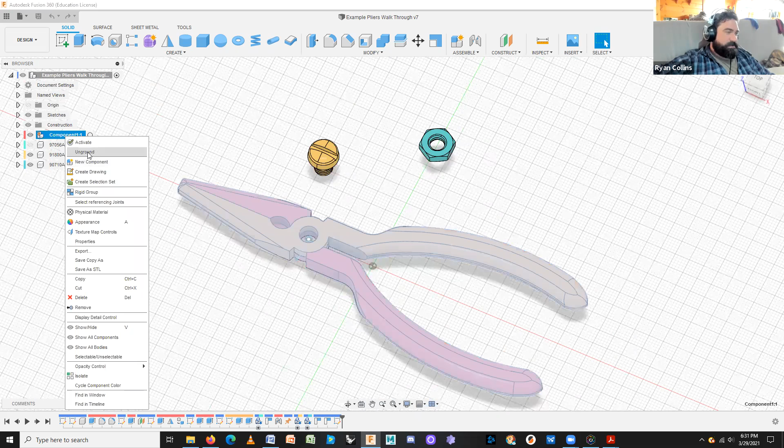Okay, so taking the model that we worked on last week, I have the pliers. One side is grounded, which remember to right click and you can ground. It's currently grounded. So if you click unground... that just locks one side to its coordinates at the moment. So now when I click and drag on the other side, it functions within the limits of the joints we placed on it. Neato.

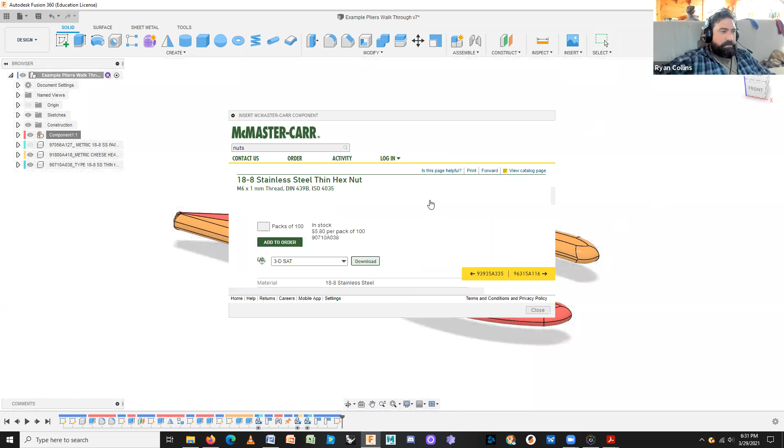Now, last week I imported hardware, which was very much the wrong size. So I imported a new screw, and I also imported an accompanying nut from McMaster-Carr, which under the insert tab to McMaster-Carr opens the McMaster-Carr function, which is exactly like the website. Find the model you want and import it into the file you're working on. It creates them as individual components. And I just moved them around on the profile plane here. Just locked them in place temporarily, just so they're positioned.

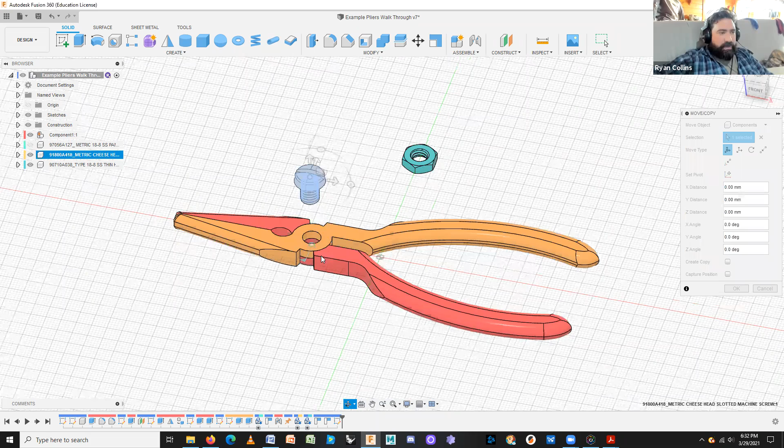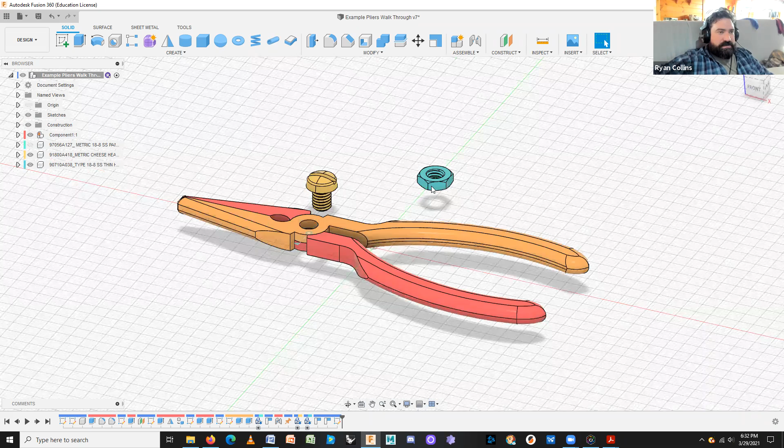So to position these, I could select the component, press M for move, drag this in position and try to get it to lock in place. But you can skip that step by using joint to actually locate an item that is going to be part of your moving element anyway. So we added the rotating joint for the pliers themselves last week. And what I want to do is snap the bolt and nut in place appropriately and relative to where I want them to be.

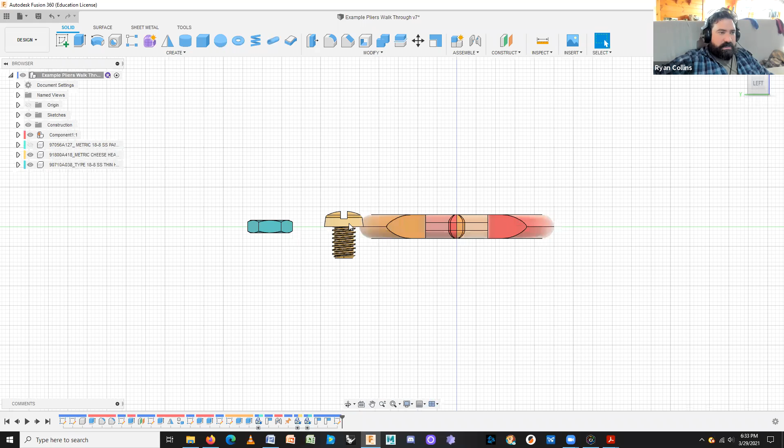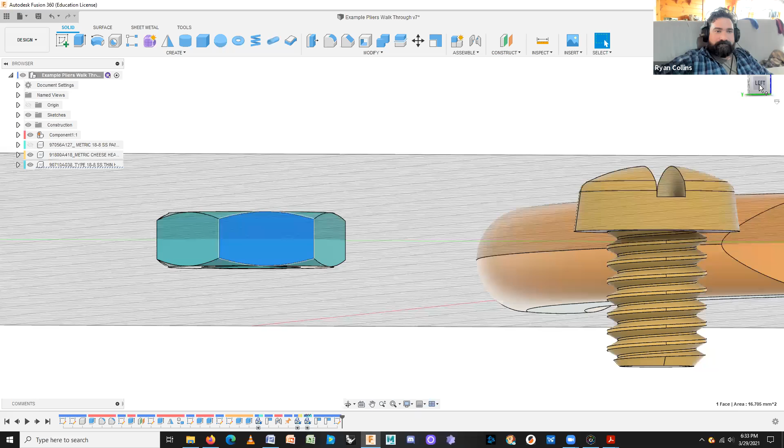So if I look on what will be the front here, where it imported the nut and bolt, it's smack in the middle of the pliers, but I want this bolt to actually be up on top where the shoulder actually sits on top of the pliers. Sorry, I had the terminology backwards. The screw is the bolt, the nut is the nut. Anyway, I want the nut to be placed underneath and located. So how to do that?

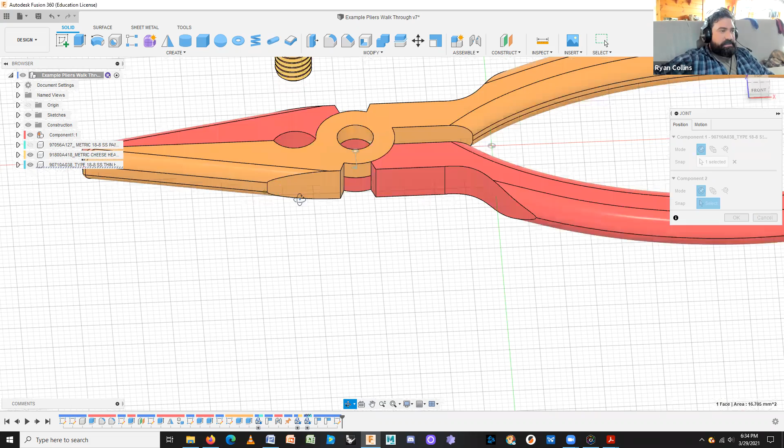When we put the joint on the pliers, the halves were already in the position they needed to be. To do this part, we're going to use the joint. So just click joint, or use the expansion bar, select joint, or press J, whichever one works for you. It's all the same tool. So remember, what you select first is what will move. What you select second is where it will move to. I want that nut to snap to the center here, so I need to select the nut first.

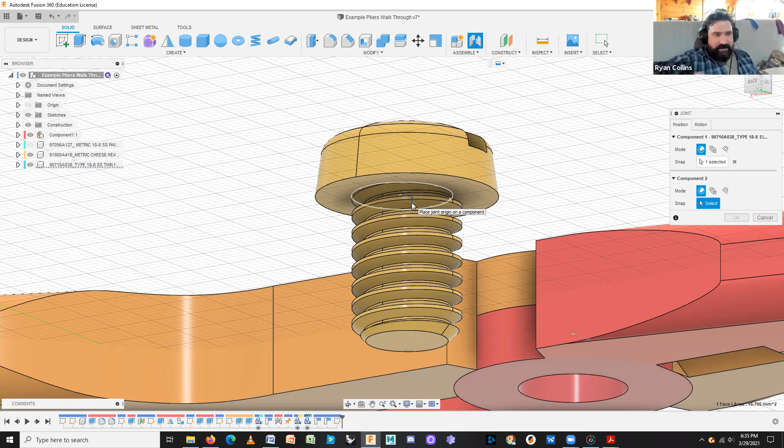But where I want it to select from is not on top of the thread or at the bottom. I actually want it on the bottom of that little shoulder of the bolt, but internal, the inside of that. If I try to select anything else, it's just going to keep trying to select the face, because Fusion functions on what is visible. So how do I get inside of the bolt to select a spot internally? We do it the same way that we selected the center of this hole, only it's actually inside.

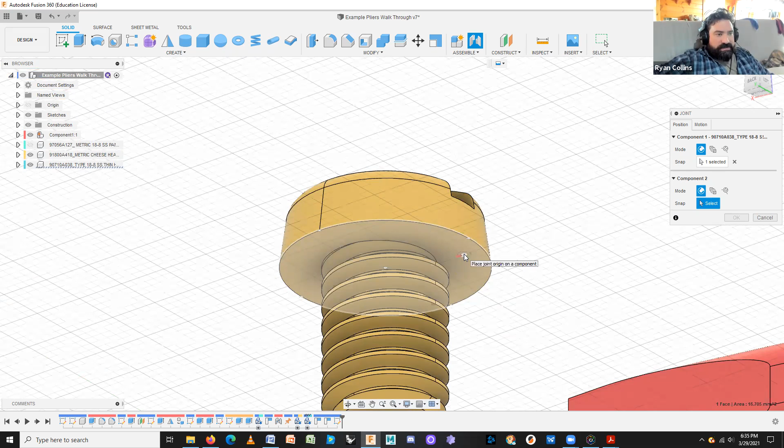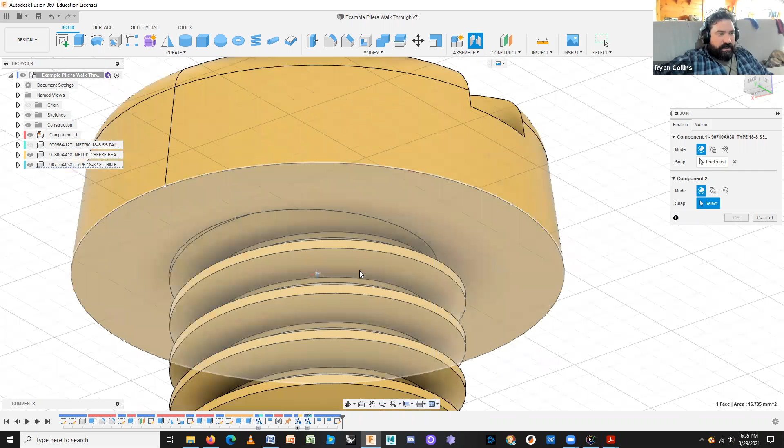So I move my cursor over the bottom of this bolt here. And you see my icon comes up, the little circle with the X, Y, and Z reference axes, little red, blue, and green tabs. If I click and hold Control, it locks it to that plane, meaning it knows that I want some point on that plane. Now, as I zoom in, you can see a little crosshair right in the center. That's what I want. Select that.

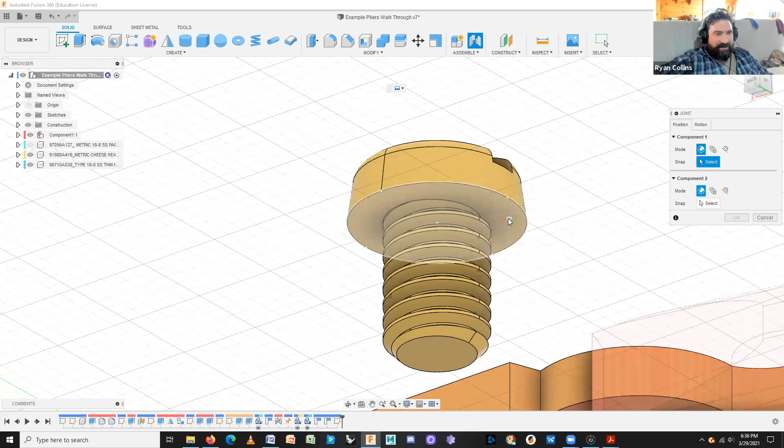What did I do? Oh, sorry. I had accidentally selected that nut. Cancel that and redo that. My mistake. So selecting under here, click and hold Control. There we go. Now it's working right. I've made my selection. The original component ghosts out. Now I can go over and select the top of that cylinder.

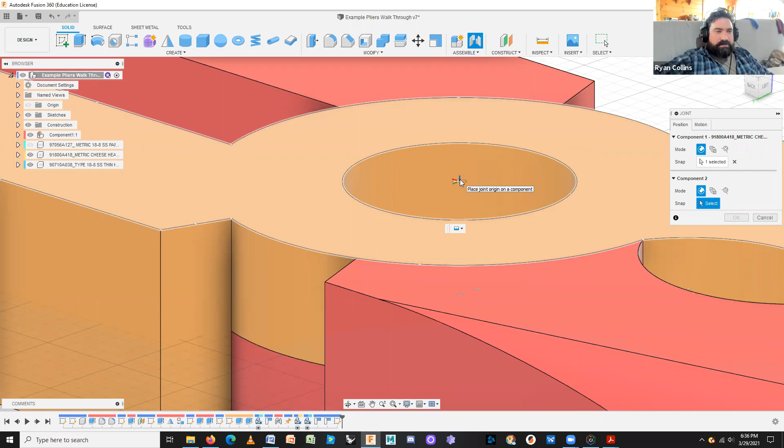So the new selection tools allow you to automatically select in the center of a space. But if you do have trouble selecting that, mouse over the surface that you want to select from, press and hold Control, mouse over to that point. I select there. It automatically snaps that bolt right in place.

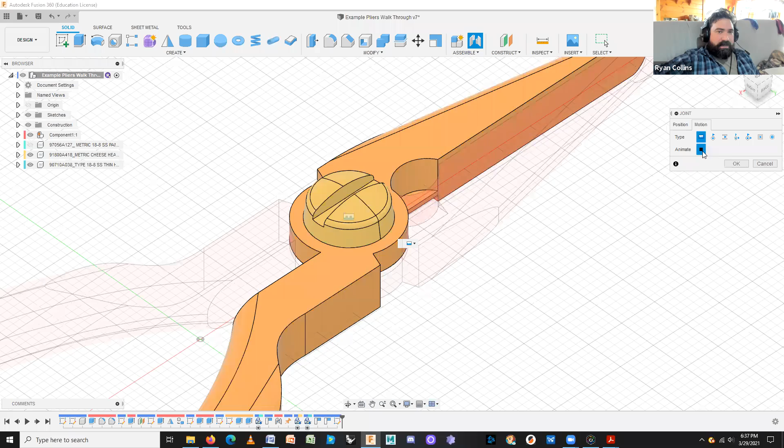Now if I go over on my toolbox and select motion, the default is rigid. That's fine. When you click animate, it does the little jiggly thingy. That's showing you that it now locks that bolt to the top of the pair of pliers. Okay, please stop animating. You're going to give me a panic attack. So I don't need that to rotate. I want that actually locked to that pair of pliers. Select OK, and we're done. Now, when I click and drag the pair of pliers, you see that bolt goes with it.

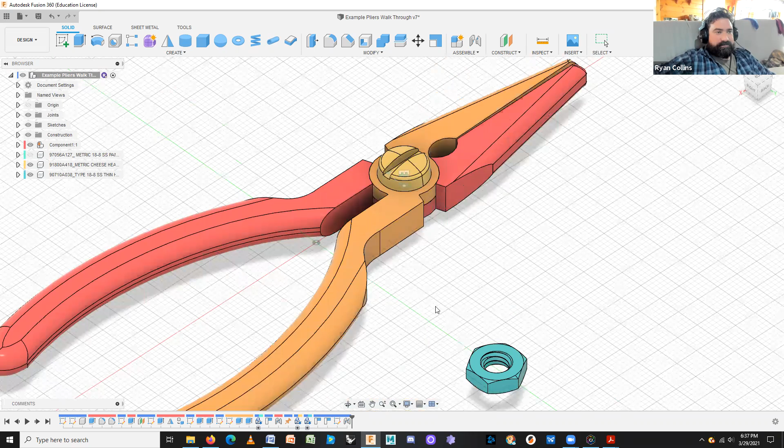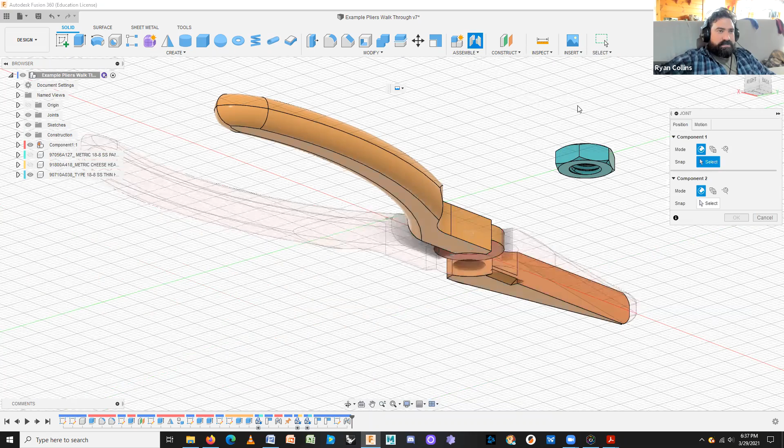Okay, now I want to put the nut in place. Same thing, just from the underside. To make this easier, I'm going to hide that bolt, because when I go to select in here, it's going to cause problems. So joint selection, I mouse over the nut. It has difficulty with those threads. So if I mouse over the face of the nut, click and hold Control, now it locks to that plane. It lets me select right in the center. There we are. Ghosts out.

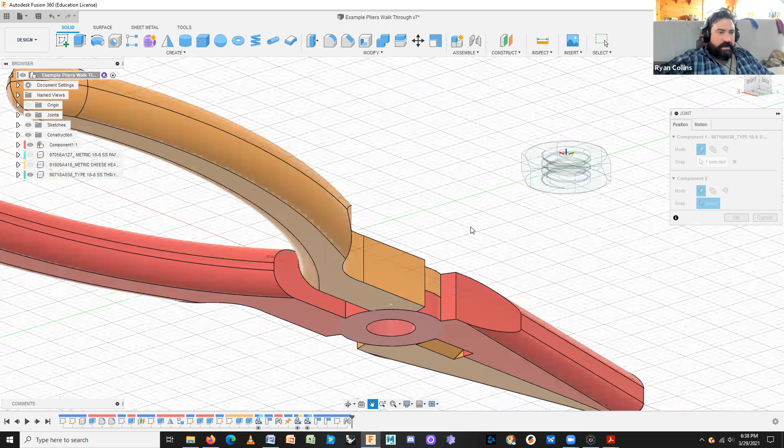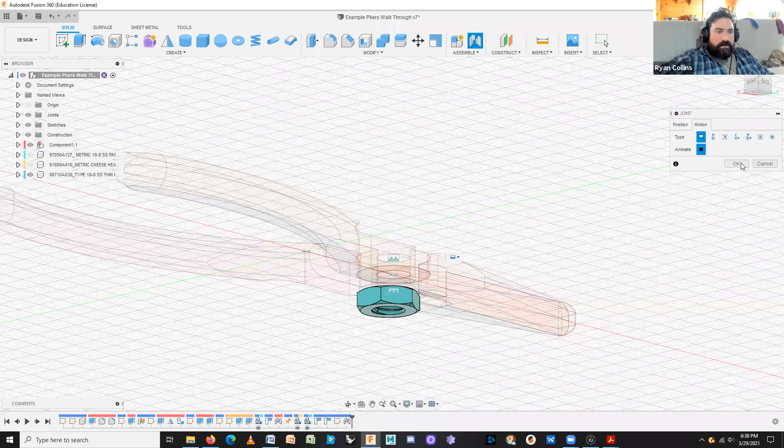Tumble my view underneath. Now the other side of the pliers, mouse over that plane, click and hold Control, select, boop, snaps that right over there. Cool. Motion, rigid joint, that is fine. Okay. Now I'll unhide that bolt. Sorry, I keep doing that tonight. So now the nut is locked to the red side. The bolt is locked to the orange side. And there we go.

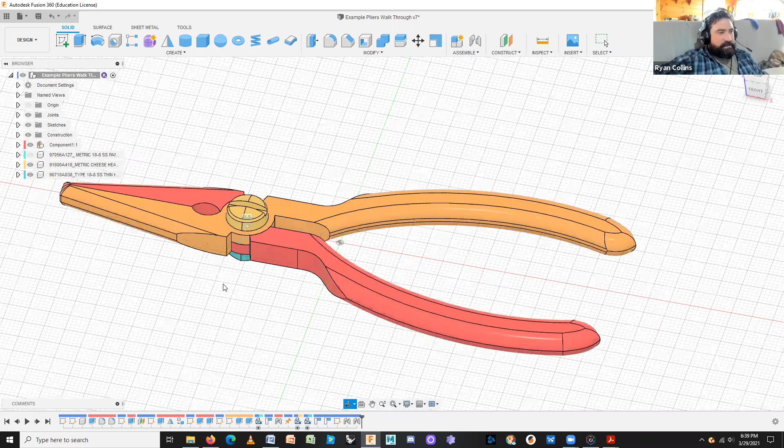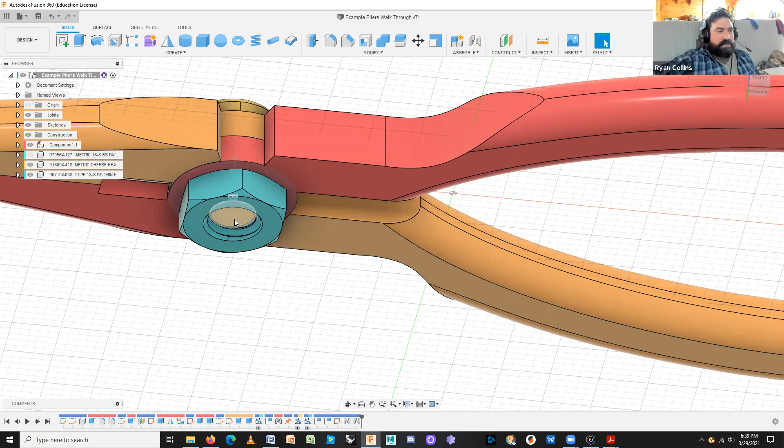Now, is that a true representation? Not really. Realistically, that bolt should be a little bit longer, and I should actually lock the joint to the bolt itself rather than the other half of the pliers. But for what we're doing here, that's fine. If I go back into McMaster-Carr and select a longer bolt, I can get the appropriate size and actually lock it there. But that is how you use the joint tool to snap your imported hardware in place. Pretty neat.